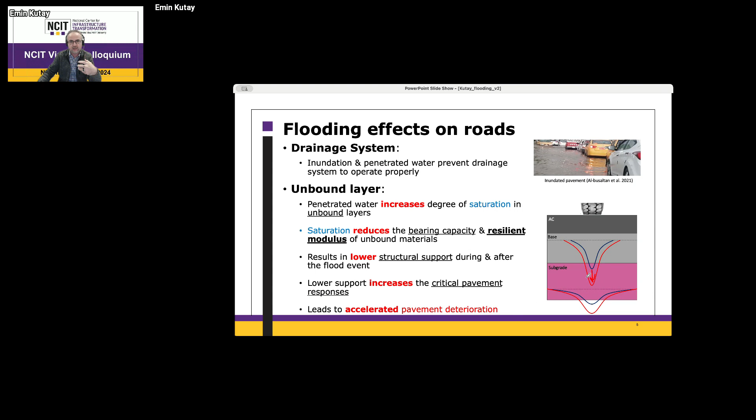And then this lower structural support causes critical strains, critical responses to increase. And when these critical responses, such as the strain distribution under a tire, increase because of the reduced structural support caused by flooding, the distresses such as rutting, cracking, and roughness accelerate, their evolution speeds up, and that's a major problem.

In addition to the layer properties, there are some indirect effects of the flooding. For example, if a flooded road is, let's say, a high volume road, as shown here, let's say this highway gets flooded, and then traffic on this highway needs to be detoured. In that case, when you have a detour like this, and you have a low volume road that is exposed to highway traffic that road is not designed for, there is excessive damage happening in that particular road.

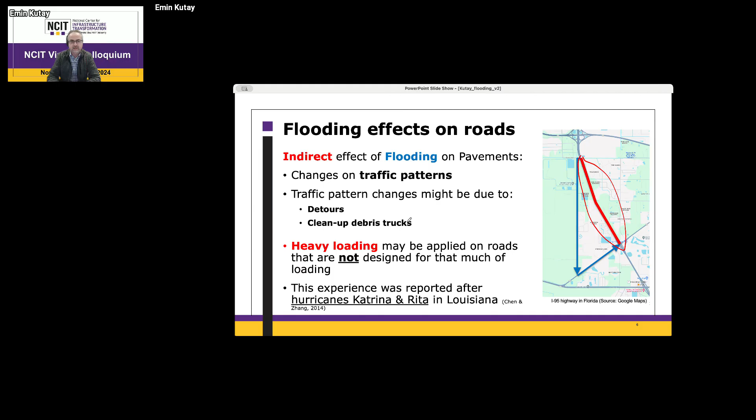And even if the whole area is not fully flooded, there is this indirect effect. Also, in addition to these detour effects, because of flooding, the cleanup or debris trucks can be very heavy on the roads, and this additional traffic caused by the emergency response can cause additional damage, and this can cause significant maintenance costs and repair costs on the pavement network.

Now, as part of this research, the key innovation that was introduced in our research is the development of a mechanistic empirical model to predict the effect of flooding on pavements. So, if you are familiar with the Mechanistic Empirical Pavement Design Guide, or MEPDG, or Pavement ME software, it is one of the state-of-the-art methods that are used by agencies to design roads or analyze roads, and there are many other models out there.

In this research, we have a program similar to that called UPDAPS, and this program has been enhanced to be able to simulate the effect of flooding on the pavement. So this model can consider the climatic effects, air temperature, precipitation, wind speed. All those are input into the model.

Material properties, viscoelastic properties, such as dynamic modulus, viscoelastic continuum damage theory constants, are entered into the model. Traffic, axle load spectra, vehicle class distribution, number of axles, spacing, all that information is input to the model, and the mechanistic part of the model predicts the critical strains or stresses depending on the type of the distress, and from these, the empirical part of the model produces the actual distresses such as rutting and cracking.

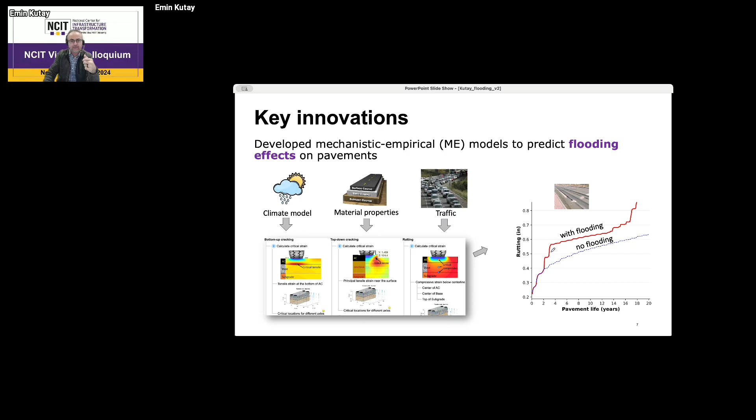Another aspect is that we would like to do this at a network level or a national level. We've been running the simulations on literally tens of thousands of pavement sections that are available in the Highway Performance Monitoring System, HPMS, of FHWA. So combining all this information and using big data and the supercomputers, we were able to run many different simulations so that we can analyze the vulnerability of the pavements in different regions in the United States.

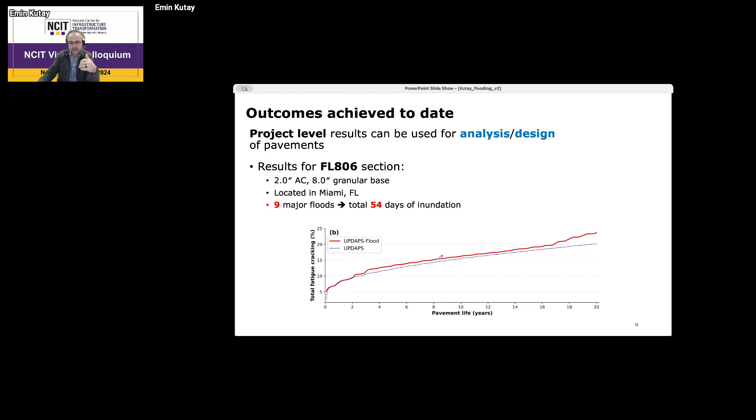So in order to quantify this effect at the network level, we defined a parameter called resiliency index, simply the time difference between the end roughness and the time it takes to get to that end roughness when the flooded simulation has been done. So this difference is defined as the number of months or amount of time the pavement life is reduced because of the flooding. So we call this the resiliency index.

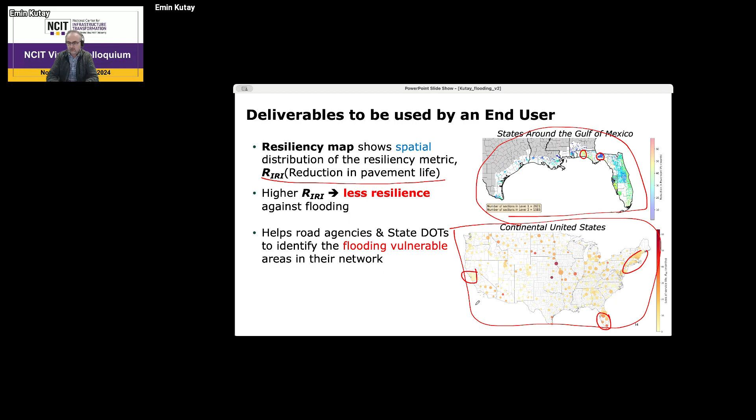So lastly, this is my last slide, just to give a brief idea of the broader impacts of our research. I was told not to show any of the equations. I did not show any of the equations. So this is just the general broader impacts.

First and most importantly, this research helps enhance infrastructure resilience by designing resilient road infrastructure capable of withstanding extreme weather events, and hopefully reduces long-term maintenance. It's a great support for decision makers through these resiliency maps, and there will be a lot of economic benefits by improving road durability. By knowing which zones of the pavement in a given county are more vulnerable, there will be fewer unexpected costs.

And it's a great adaptation strategy to climate change, and it supports the sustainable engineering practices of counties and cities. And it has a lot of educational and community impact, because the insights gained from this research could be used in universities and by new engineers, so that they can design future pavements and future infrastructure better.

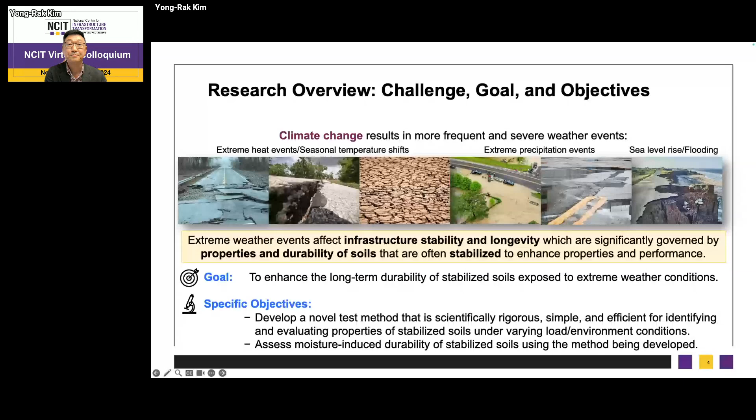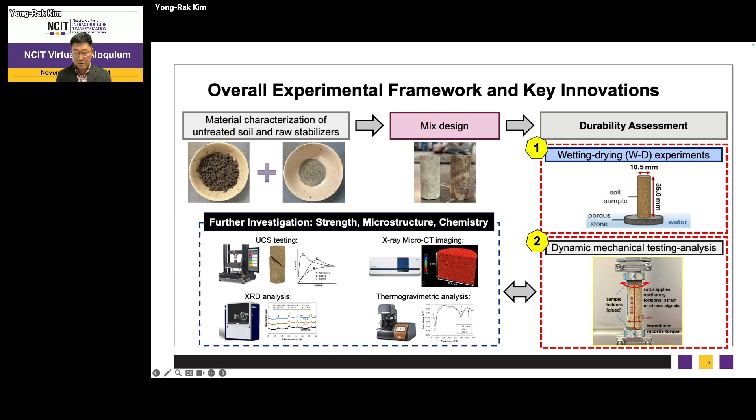So that's our key innovations. I will get some more details in a minute. Number one, number two, the innovations are there. And to make that methodology being developed more viable, we also want to see some other aspects like mechanical strength from typical UCS testing and microstructural analysis using XRM, and also some chemical analysis to understand reactions and kinetics and degradation due to the durability aspect.

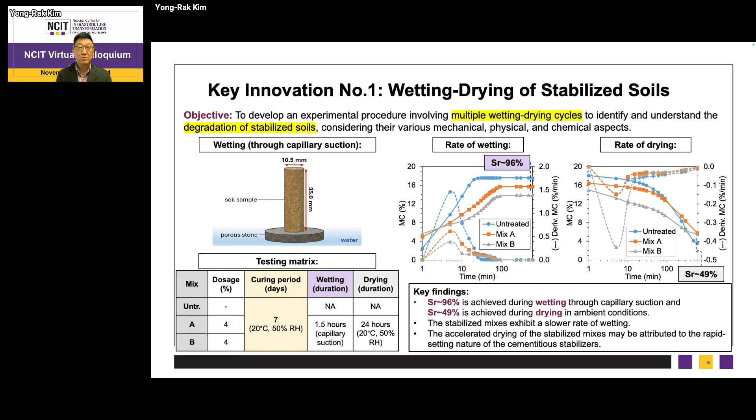So the key innovation number one is wetting and drying cycles of stabilized soils. We again make a small sample and put it on porous stone with water infiltrated, and this is a very nice way to make a very uniform wetting condition up to about 95-96% saturation. And also after drying, we can control it nicely down to about 50% saturation level. And this WD cycle can be repeated, then accompanied by this dynamic mechanical testing, again on the same sample, and then we can assess mechanical properties using the small sample with rheometric analysis.

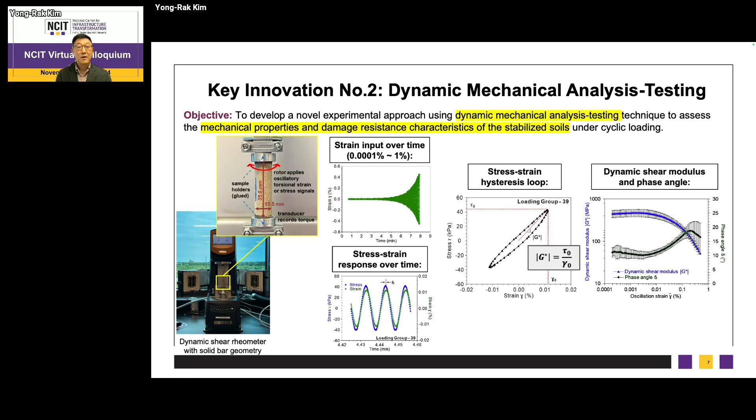And this testing is very simple, but it can provide a lot of information on materials. We can see how stiffness degrades, how failure happens, and also how the energy dissipates due to this mechanical loading associated with wet-dry cycle degradation. So we have developed this methodology, and so far we could see that about 5 small samples will give us a nice level of confidence up to 90% with good repeatability. If you want a little more accuracy, you need a few more samples, up to 8 samples.

But we believe about 5 samples will be enough to get you a pretty good idea of the materials you are dealing with. And also on the right-hand side, after we developed this methodology, we could implement it for different materials, stabilizers, and different types of soils with and without stabilization. And we can get very nice, sensitive differences between cases that testing captures, with good repeatability again.

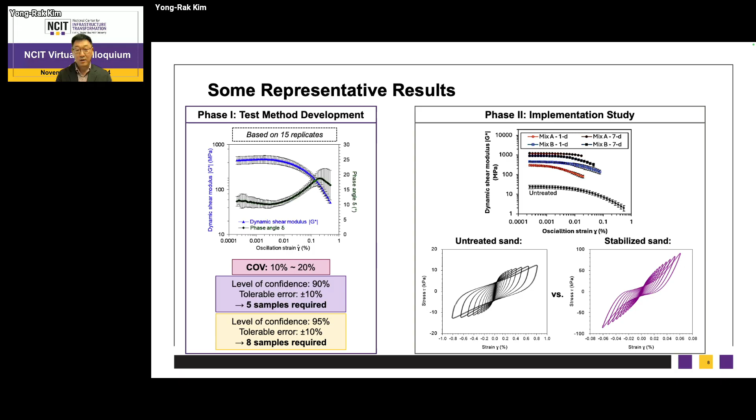So we are very happy with this new methodology under development, and we believe this methodology can get us a pretty good idea differentiating the effect of repeated wetting and drying cycles, for the assessment of durability as part of it. I mean, durability includes a lot of things, but particularly in this project, we focus on the effect of wetting and drying cycles. So here, just some representative results I can share.

We see that with more and more WD cycles, obviously the soil sample degrades, and it gets property changes, like shear modulus stiffness degraded, and the failure strain also changes, with different levels of energy dissipation due to damage accumulated, and the WD cycles obviously affect the material property in the sample. So what I'd like to say is the methodology is very, very simple, efficient, cheap and fast, but scientifically rigorous. It gives us a lot of good information.

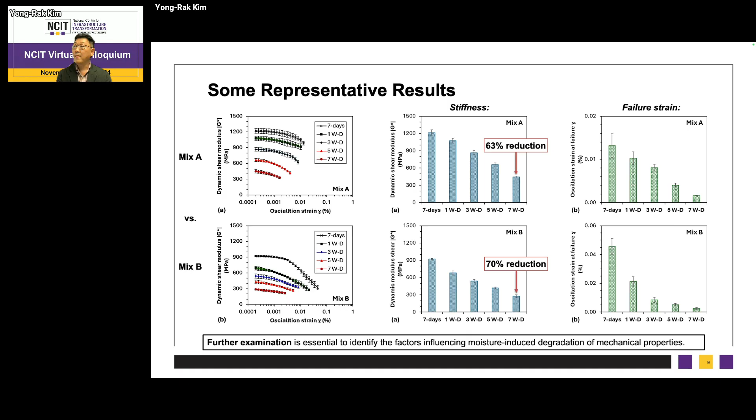So within the year, our students and workforce made a lot of efforts, and we could develop the methodology in good shape. But we are interested in whether the methods we are talking about can be integrated with other measurements that give us different kinds of information, such as bulk level strength like UCS, chemistry with QXRD, and also microstructural investigation using an X-ray CT machine. So by integrating it all together, we can get better confidence in the new novel test methods for durability assessment of soils. So this is underway.

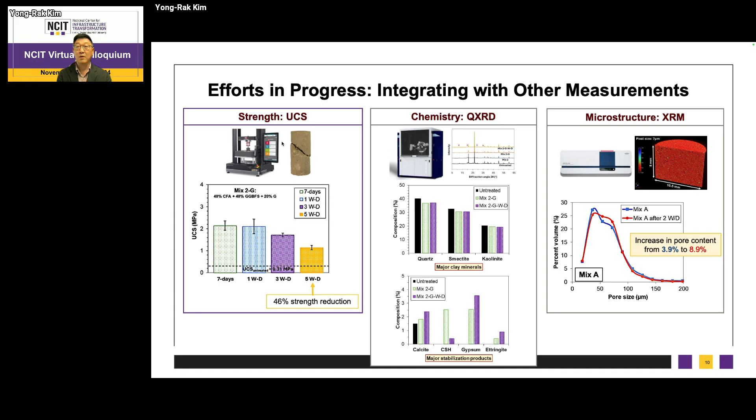In the second year, we're going to focus more on that, and then we try to develop the methodology in better shape for potential practical use. So regarding outcomes, we have publications. One paper is in press, and also three nice presentations were made already. And Ayazan, my student, is working on the dissertation, including this type of effort, DMA, the durability aspect of soils with stabilization. So we have already got a lot of outcomes published.

So in the end, what we really like to develop is very user-friendly, ultimately specification-type test methods, laboratory testing that can give us scientific information with great efficiency. We try to develop simple testing, but scientifically rigorous, for the assessment of soils with different additives and the associated environmental conditions, and how we can make the material better in many geotechnical engineering and pavement engineering transportation infrastructure systems.

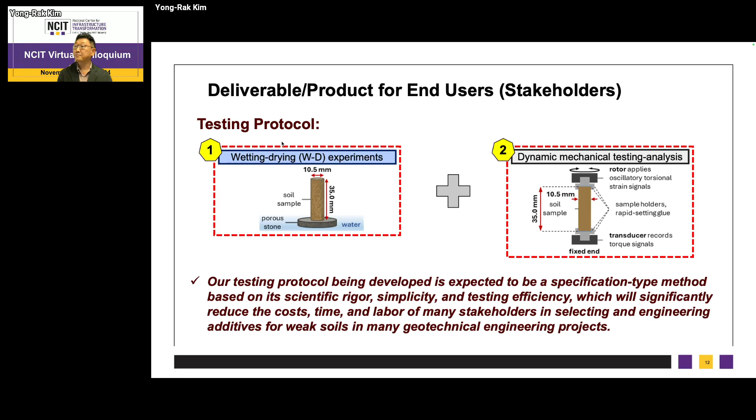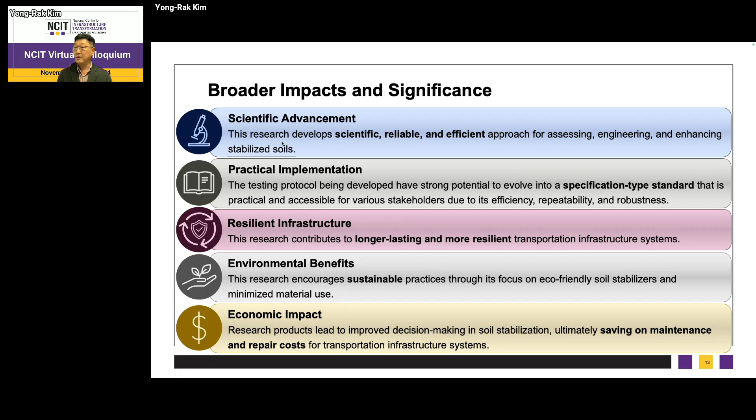So broad impacts, significance, a lot. We try for scientific advancement. We never forget practical implementation, practicality for the end users. And ultimately, we develop better infrastructure systems, environmentally beneficial, and economically cheap and cost-effective. So I think I mentioned pretty much about that.

In summary, we are working on new test methods for soil durability with stabilization, and we really appreciate financial support from NCIT and TTI, and also the experimental capability in CIR.

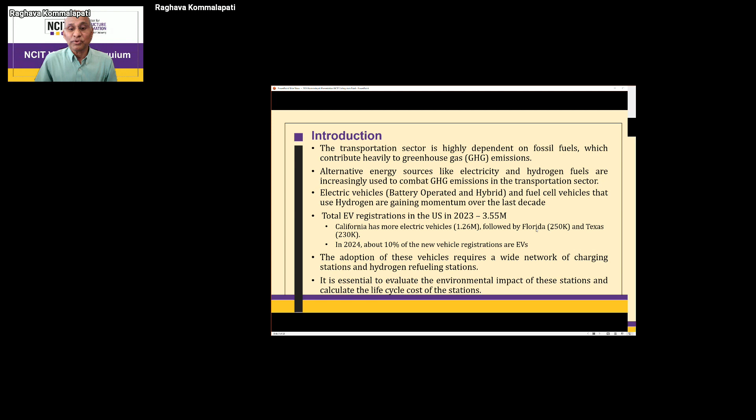But adopting this kind of change in vehicles, change in energy is going to require a significant network of charging stations. Obviously, if you don't have enough charging stations, that discourages people from using these vehicles, and it has been shown time and again that states and cities that don't have these facilities don't have that kind of increase in these vehicles. So if we are going to build all these, then we need to have some kind of understanding of what their environmental impacts are.

So here you see the growth of charging ports. Port means one car, and location is how many stations you have. As you can see, the graph goes up to 22, but as of 2024, there are 214,000 charging ports and 74,000 locations. This exponential growth is because about 2 years ago we had this bipartisan law passed, and as a result, more and more of these electric charging stations are coming on board.

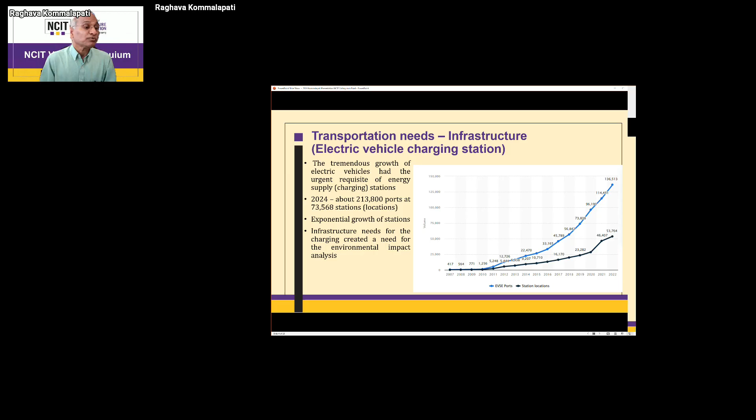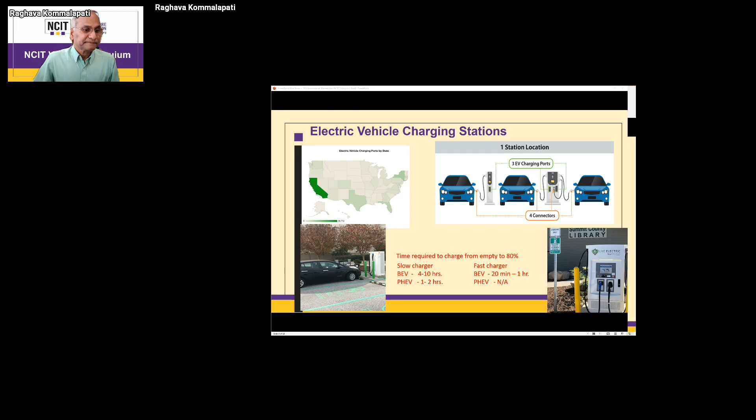Okay, so what is it we are doing? Our approach here is what we call prospective LCA, where one could proactively identify where the problems are, meaning where the maximum emissions are, and then see if we can redesign that process or phase, or use different forms of energy or different materials, so that we can reduce the emissions in that phase. This is highly relevant for built environment and infrastructure related projects.

Okay, so here is the methodology. LCA is basically cradle to grave. And what are the different stages? If you take a product, they include material collection, maybe mining.

Raw material extraction is done typically, depending on what material you're talking about, by mining. So you take from mining, then process that, transport the materials, and then manufacture the parts that you need, assemble them, transport them, and then install them, and finally utilize them. And at the end of the utilization period, you dispose of them. Every single step in there contributes towards this life cycle environmental impact.

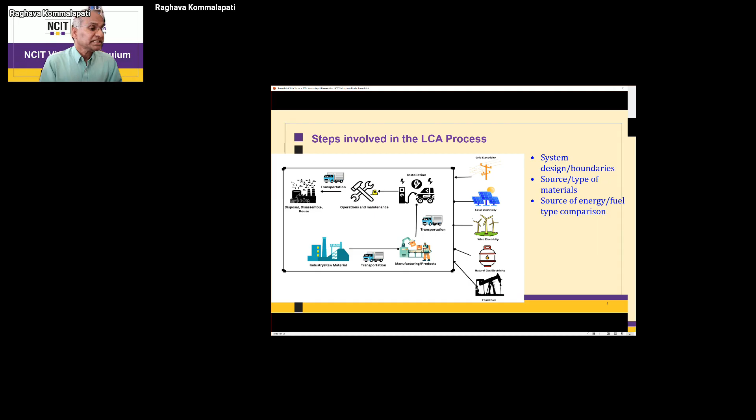Every step we have energy consumption, water consumption. Now, where is the energy coming from? Is it coming from the typical grid, or are you using energy specifically from renewable sources like wind or solar? All that goes into estimating these life cycle impacts.

Okay, so we used SimaPro 9.6. It's a very well versed system. A lot of folks use it in very high application, in Europe particularly. We used LTS 2023 data. Additionally, we reviewed literature and we collected specific data for this project, like materials, production, transportation, etc. So that's what we used.

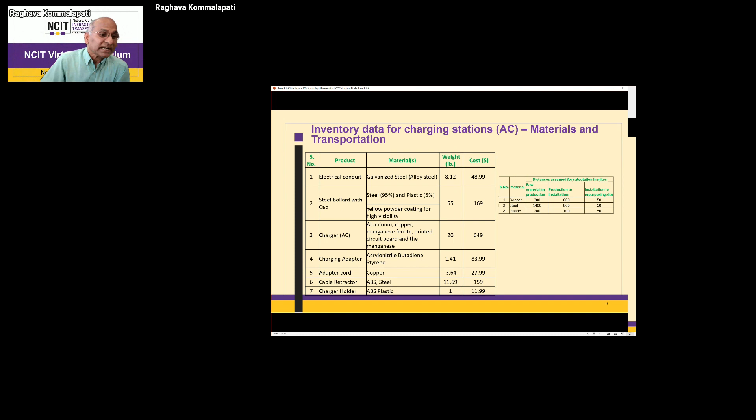So here, again, I don't want to go into granular level data. This is some of the data that we used, just sample data here, materials and the transportation. Then when we put all this in, we get data. So here I'm showing 10 representations.

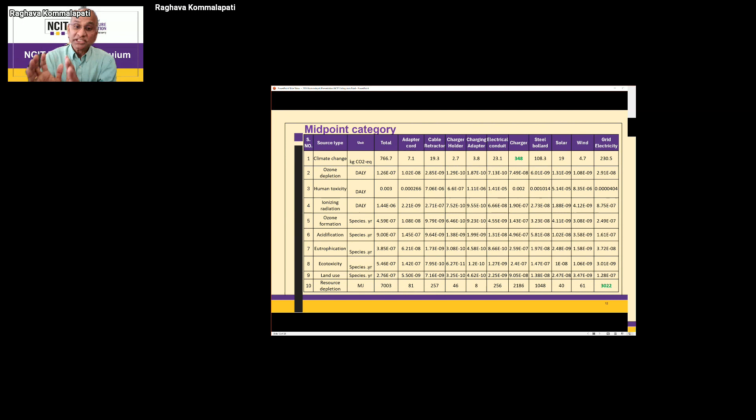Kommalapati, sorry to interrupt. We're coming to the end, likely having some time problem. If we can pace it up a little bit, sorry to interrupt. Okay, so I'll take 2 more minutes. I think I started at 2:15. That's why I'm monitoring the time. But anyway, okay. Oh, my bad. Sorry about that.

Okay, so the midpoint categories here, I selected 10 of them: climate change, ozone depletion. As you can see, those units are DALY. DALY stands for disability-adjusted life years. The next one is species, its impact on number of species per year. So as you can see, these are different categories.

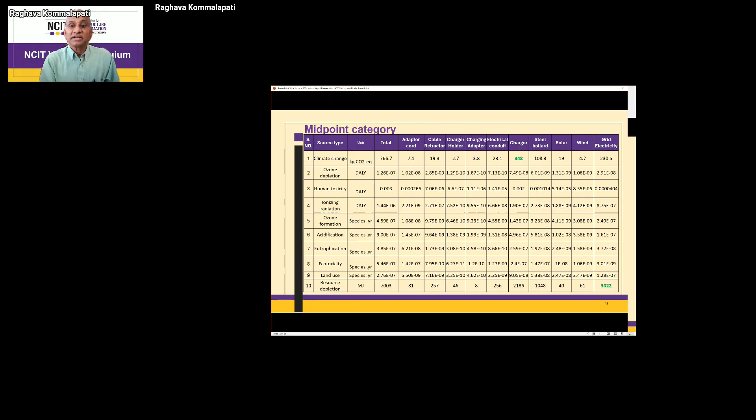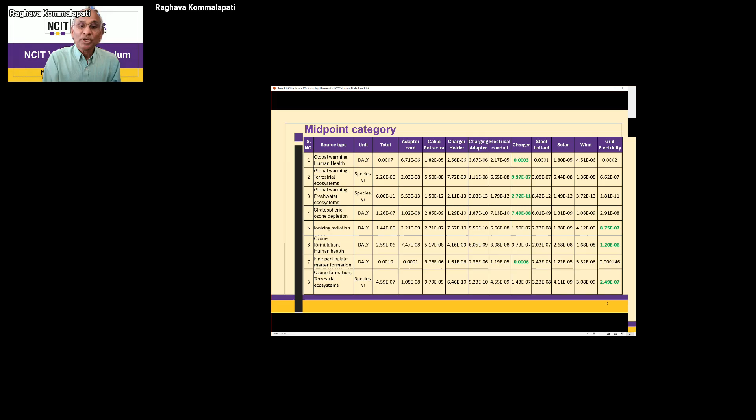And finally, I want to show you these endpoint categories. So obviously, this is what you want to be looking at. But remember, when you go from midpoint categories to endpoint categories, there is a lot of uncertainty involved in moving from midpoint. You make a lot of assumptions about how these factors would impact human health. So there is some uncertainty incorporated into this.

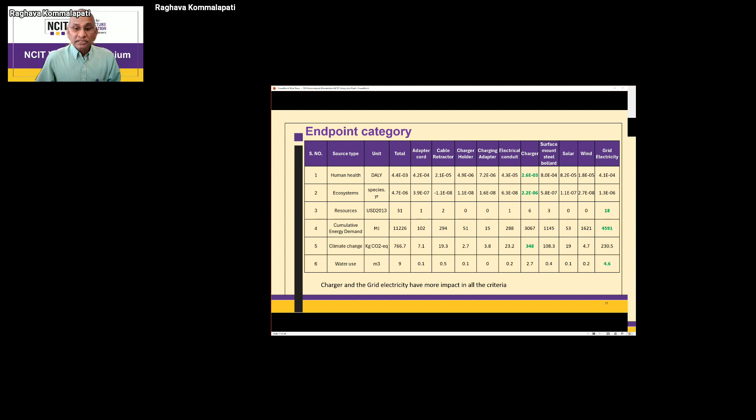But the 3 systems, that is human health, ecosystem, and resources, and then you will see energy, climate change, and water use. So these would be our numbers towards the endpoint, right? So same information that I showed you. So I'll move through slides quickly. This is shown in bar charts.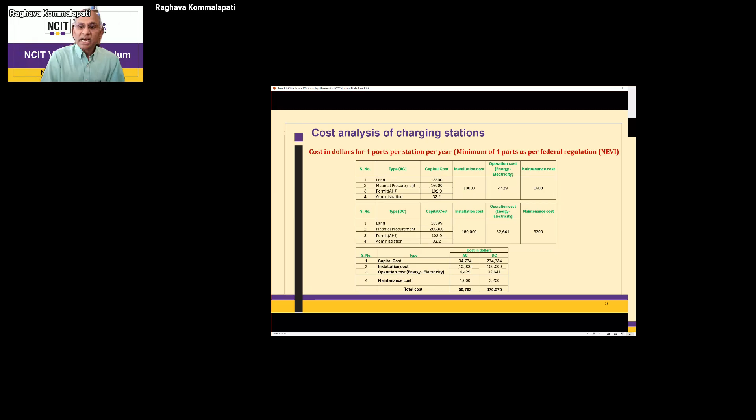All right, so this is cost analysis. I'll skip over them. And so as we can see, there is a lot of information that comes out of these tools, and the important thing is how we interpret this, and that's what we are working on right now. So we are also working on hydrogen fueling stations. So eventually we want to have gas station, electric charging station, and hydrogen fuel station that we want to compare.

Okay, so this work is contributing towards sustainable development of future infrastructure, which is obviously the goal. And so we're supporting undergraduate and graduate students and a female staff person, and we are publishing this work. We haven't published any yet, but we will be publishing. We presented our work in a couple of locations already. So that is what I have, and I will stop.

And I did take only 14 minutes, Dr. Cetin. Yes, sorry, Dr. Kommalapati. I should have timed it. My bad. I apologize for it. No problem, no problem. Thank you very much again. Just write down the questions to Q&A.

And we have one more speaker, Dr. Demetracopoulou. I hope I'm saying it right. Yes, that's close enough. Yeah, Demetracopoulou. Okay, thank you. Thank you. And do you mind if I introduce you quickly? Of course, go ahead. Okay, thank you again.

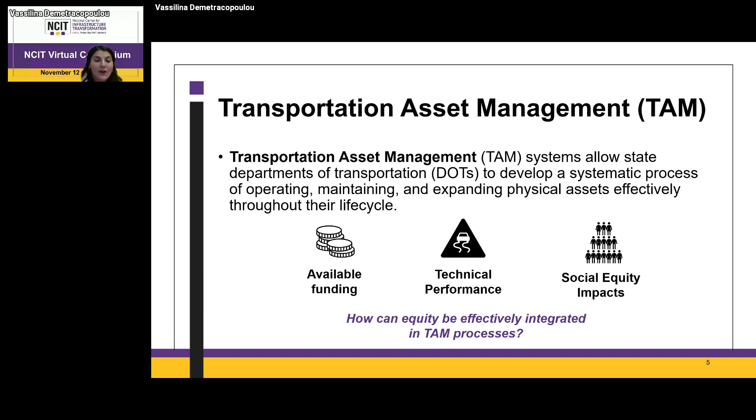So that is basically the key question we're trying to address: how can equity be effectively integrated into our TAM processes? Now, the transportation needs being addressed at the higher level align very, very closely with some of the research pillars of the NCIT Center.

So first, on infrastructure durability and resilience, our goal here to provide a methodology for integrating equity in TAM systems can really help in ensuring that assets, particularly in vulnerable areas, are adequately maintained and increasingly resilient. And again, that shouldn't be at the expense of assets in different areas, but there is a way to balance this when we make decisions, so that overall network performance remains at our highest possible condition, while we also consider some thresholds for vulnerable areas.

In terms of policy, a key element is understanding the misalignment between policy and implementation, particularly as we now collect input from experts across different DOTs. We see a lot of discrepancies around how different tools are being utilized, and how can we provide efficient recommendations in terms of people, process, technology, to make a lot of the existing policies be more efficiently utilized, but also how can we inform future policymaking.

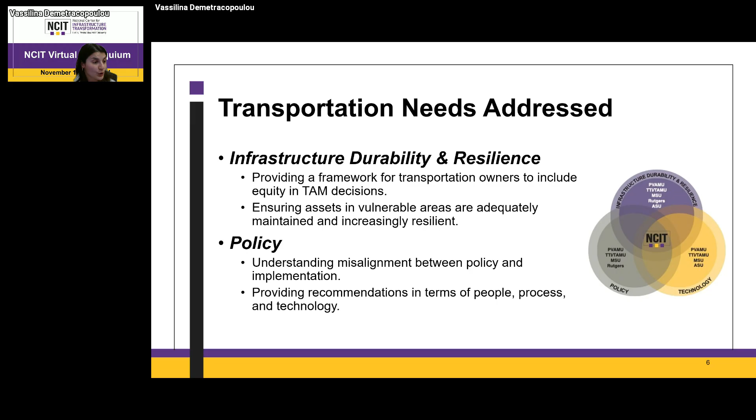So one of our keys when we set out to make our methodology, and what is going to be new about this work, is that we want to not reinvent the wheel, but include federal mandates that are well understood and are easy for DOTs to incorporate into their actual decision making and practices. So our first federal initiative, as I'll explain later, is to use those pillars to organize a lot of the data we collected.

The second is using an equity metric that's well understood and vetted, again, by federal initiatives. So in 2023, the USDOT released the ETC Explorer, the USDOT Equitable Transportation Community Explorer. Now, this provides a depth of information around vulnerable communities around the US.

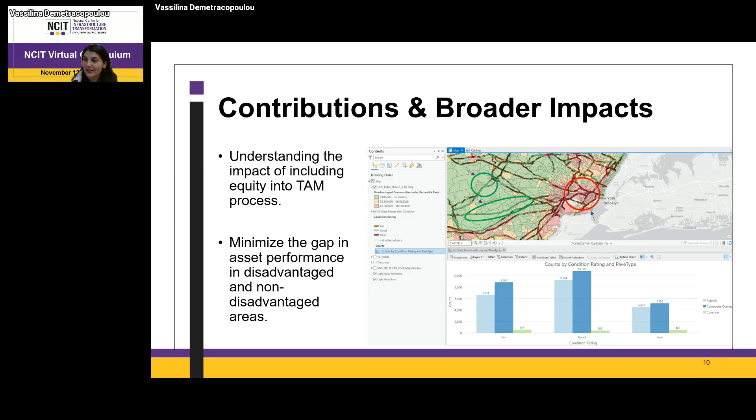So ultimately, what we're trying to achieve with this use case is understanding the impact of including equity into TAM processes and minimizing the gap in asset performance in disadvantaged and non-disadvantaged areas. Again, I ran through as quickly as I could given the time constraints.